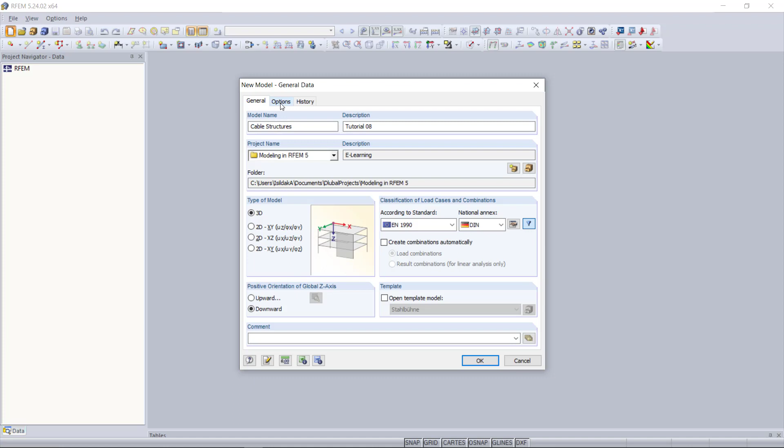So we can see here the dialog for the general data, and here we have to define a few more settings than usual. First, we will select a 3D model instead of a 2D model. Then we have to activate RF-FORM-FINDING, which we can find under options, and then click on this checkbox here. Then we can close this dialog by clicking OK. Our example will be a mast with 4 cables. We will start with creating the mast.

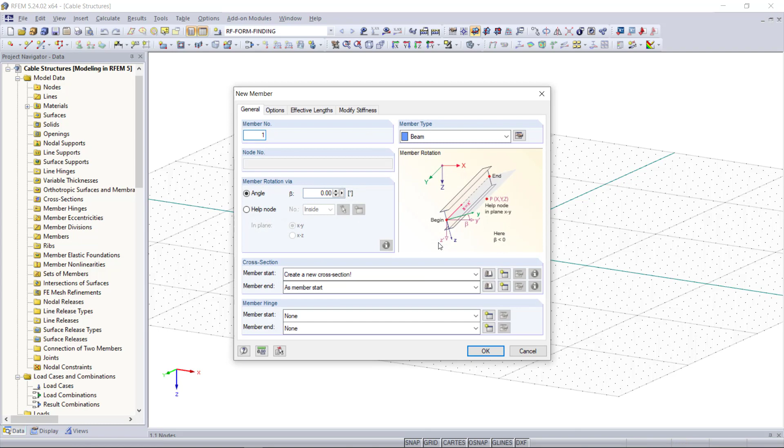For that, we will choose new member up here in the toolbar, and as cross-section we can set, let's say, a rolled cross-section, this one here. The material we can keep steel. Our mast will consist of 2 parts or 2 members. The first one will be 10 meters and the second one will have a height of 8 meters, so in total we have a height of 18. For an easy way to create the member, we can change the work plane up here to the XZ plane. The first node of our first member will begin here in the origin, up to 10, then the second one with a length of 8 meters.

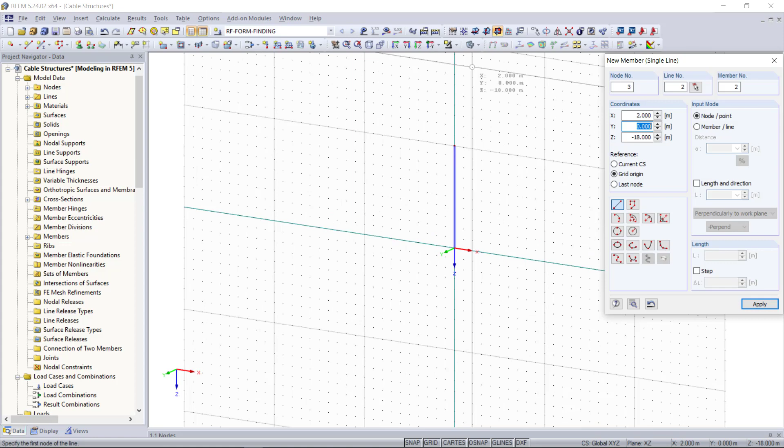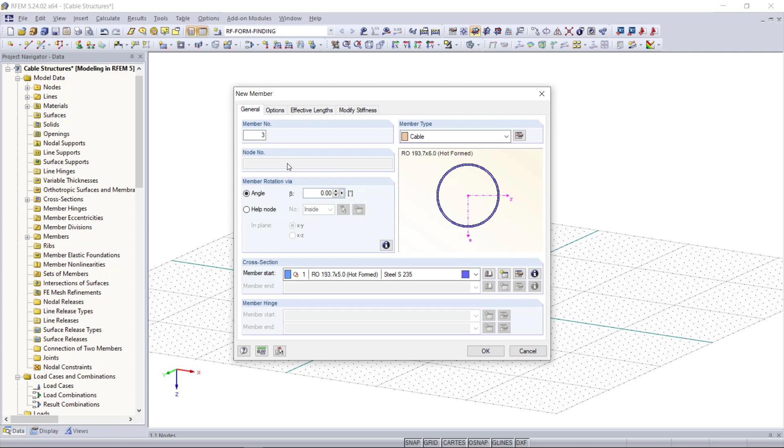Now we can switch back to the XY plane, and next we will create the cables. For that, we click here on new member again. As mentioned in the beginning of this video, we will set the member type to cable. Then we can open up the cross-section library once again and choose a cross-section. We will choose a solid section, and under filters on the left side, we can choose a cross-section according to any standards. We can also find cables according to the cross-section type. We will choose, for example, fiber, this one here, cable PE15. Now we can click OK through all of these dialogs.

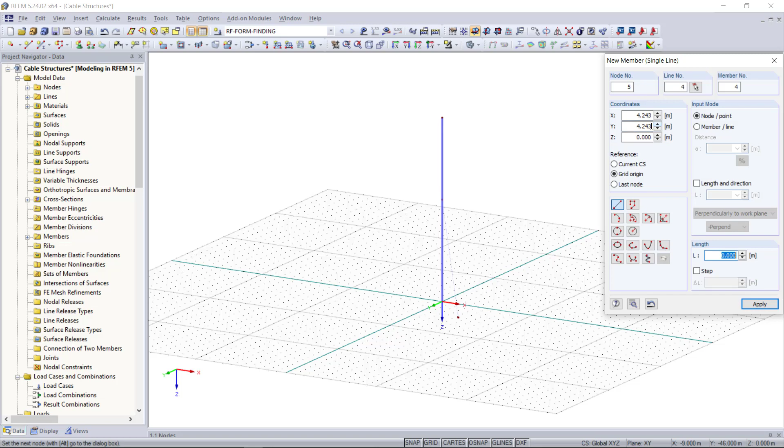We will place the first cable starting from the middle node down here to the point with the coordinates x 4.243, y 4.243, and z 0. We can quickly copy this cable 3 more times with the command up here called mirror. First around the XZ plane and then these 2 around the YZ plane. Then we also need some supports, which will be hinged ones on each node.

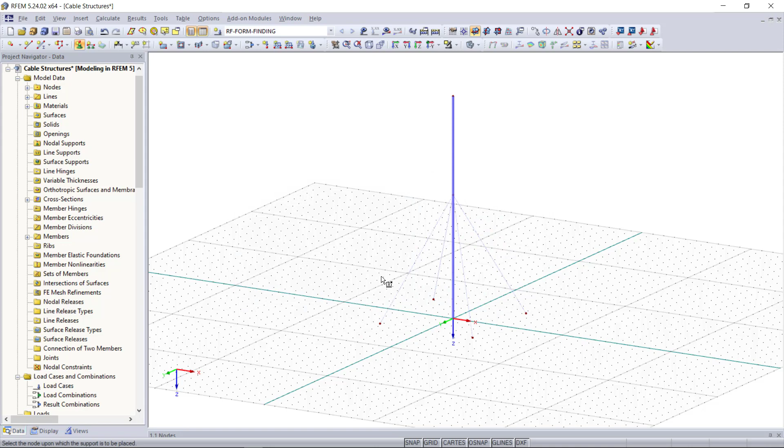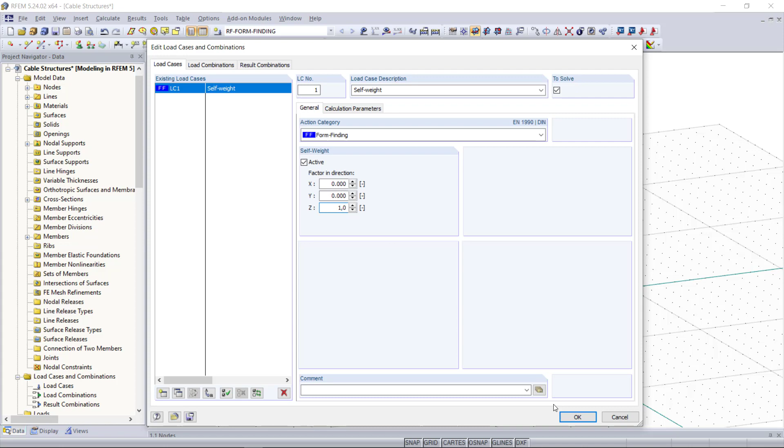Now that we have our structure, we can move on to the loads and load combinations. First, we will stay with one load case, which will be the self-weight. What's important here is to set form finding as action category, activate the self-weight and enter Z 1. Then we will select all 4 cables, and with a double click we can open up the edit member dialog. Since we've already activated RF-FORM-FINDING in the general data, we can open up a new dialog by clicking on edit member type. Otherwise we wouldn't see this option here.

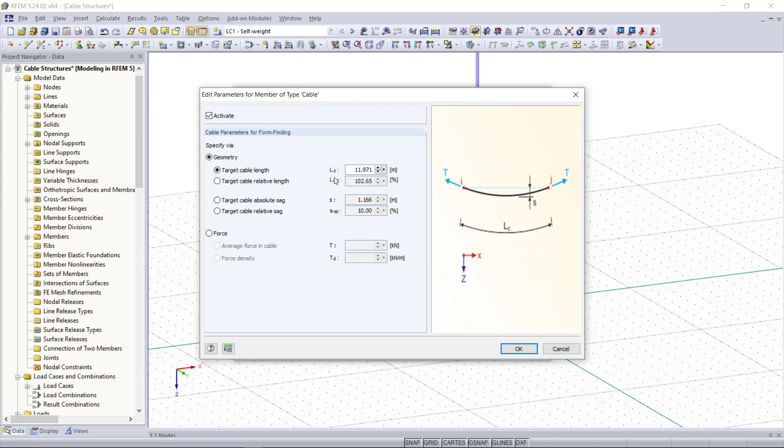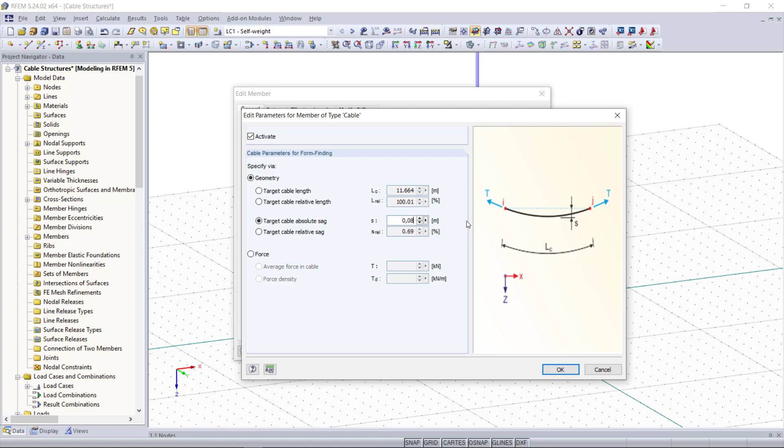And what can we define here? So we have the cable parameters for form finding. We can specify these via geometry or force. We can set a target cable length or a target cable absolute sag. For our example, we will define an absolute sag of 0.08, and the other parameters are filled in automatically, as we can see here. The next step will be defining the calculation parameters, which we can find under Calculate.

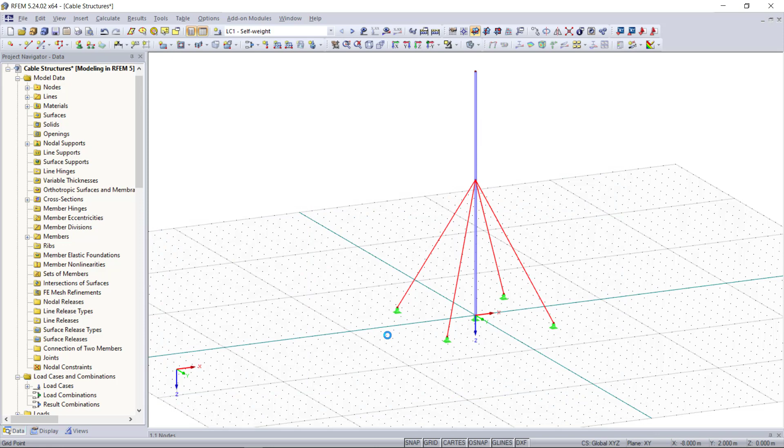In this dialog, we have the tab Form Finding. Here we will set a maximum number of iterations of 50, and the speed of convergence will be 0.1 to get more precise results. Now that we have our load cases and also settings, we can run the calculation and then have a look at the deformation of the structure.

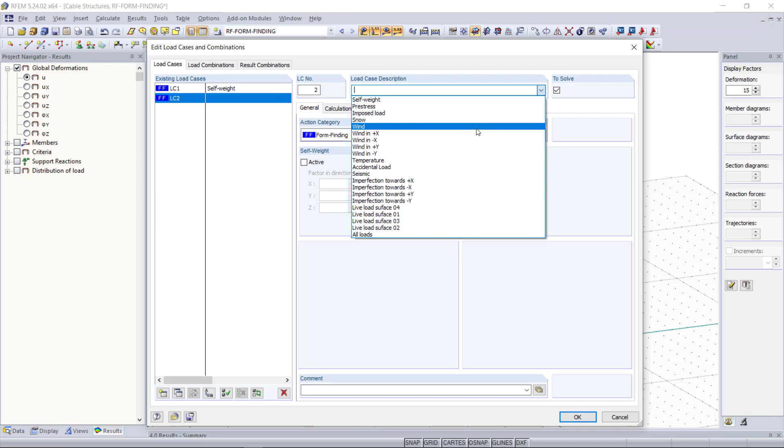As a second example, we will apply a wind load of 2 kilonewtons at the top and calculate the system again. What we can see with these results is that while the 2 compressed cables do not absorb any load, the other 2 cables have a normal force like it should be.

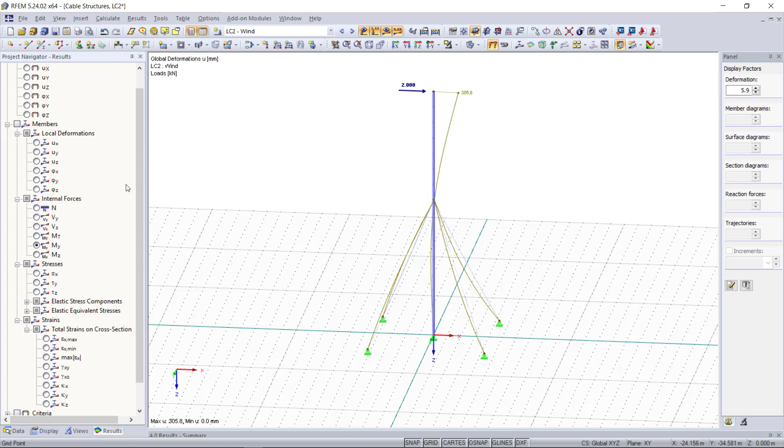It's also interesting to have a look at the calculation diagrams. For this, we go back to the dialog of the calculation parameters. In the last step, we can have a look at the calculation diagrams. Here we can see why the calculation according to the theory of third order takes longer and how the calculation approaches the final results with each iteration step.